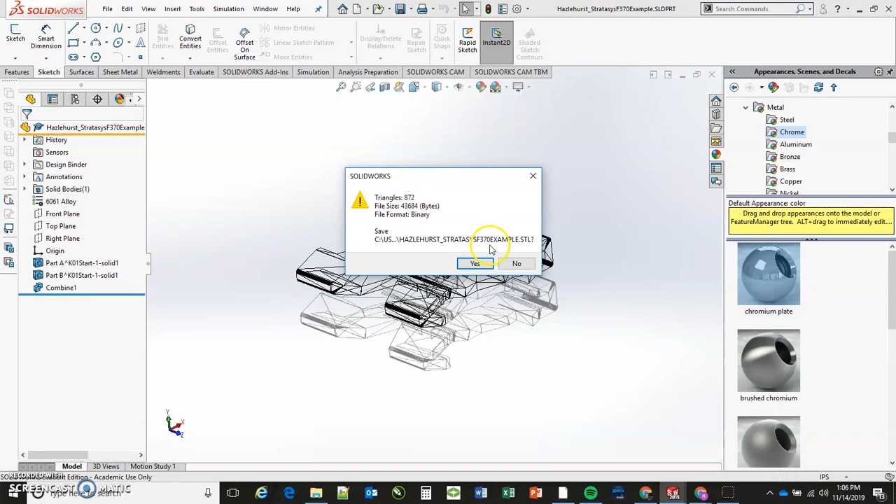After clicking Save, you now have your STL file. It will come up with a message saying that it's converting it into triangles, and that just means that it has created a format that the STL printer can then read and process.

Once you've created the STL file, you can now move into the 3D printer software to get it ready for 3D printing. This is often referred to as slicer software, meaning that it takes the file and cuts it into layers, which then can be printed one layer at a time on the 3D printer. In this case, we're using GrabCAD Print, which is the software used by the F370 printer.

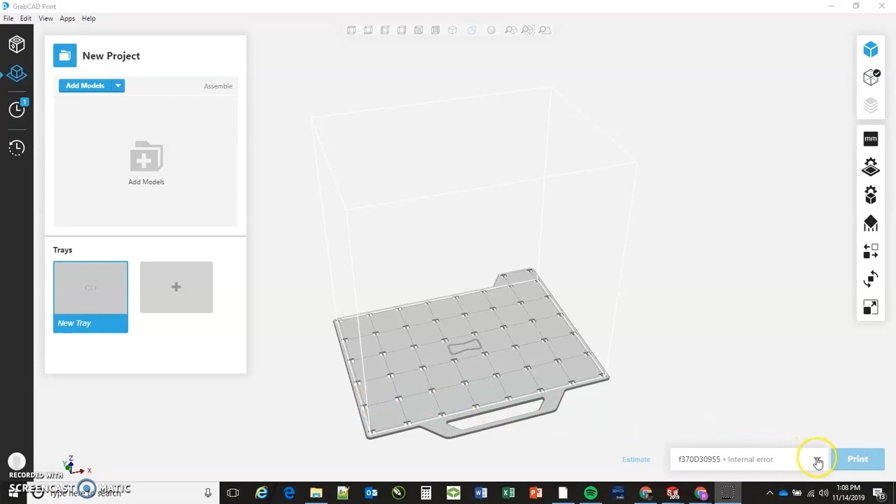You can see here that we have a blank tray ready to go, and what's important is to select the template for the machine that you'll be using. In our case, we need to look for the template for the F370 printer, so you'll need to scroll down the list until you find the Stratasys F370.

One thing you may want to consider doing is clicking on the star, which adds it to your favorites list, and will put that at the top of your menu so that every time you start into the software, you'll conveniently have access to that template. Once the template is selected, you are ready to move on to the next step.

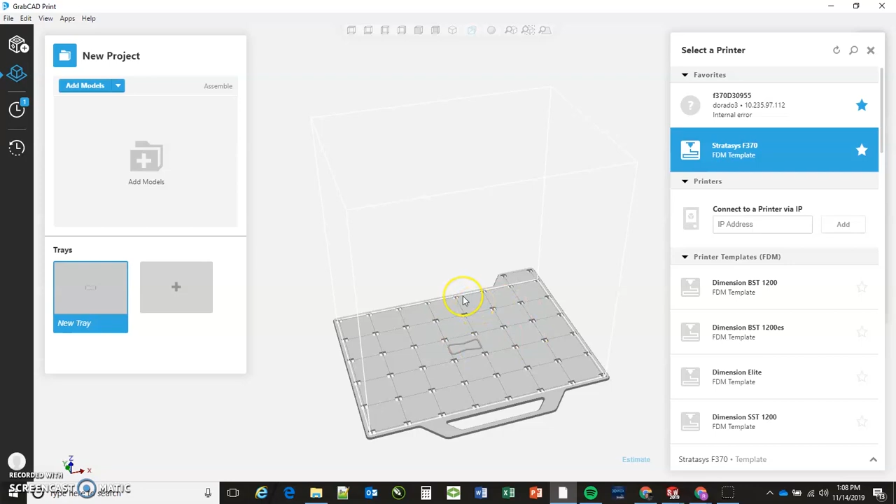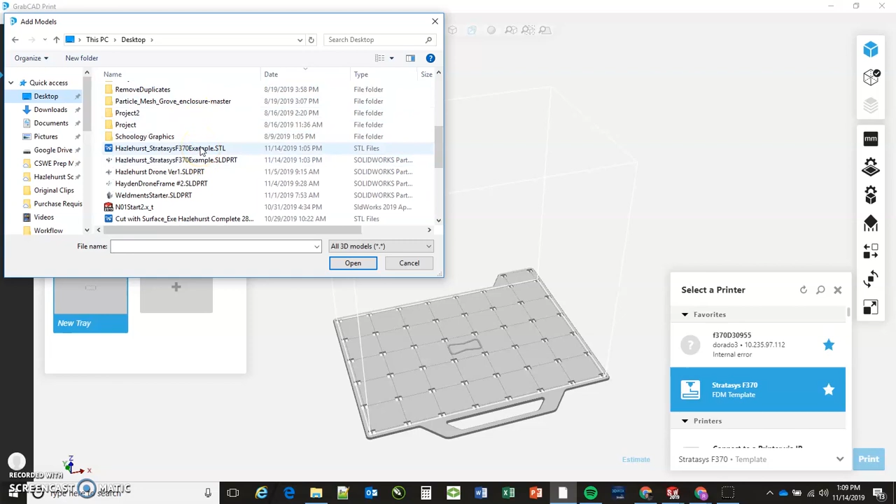You can go over to the Add Models tab, click on that, and it'll open up the directory where you can then select your file. In our case, we saved our file onto the desktop, so we want to look for our file on the desktop and make sure to select the one that's in the format of STL. Once we select that file, we can click Open, and GrabCAD Print will automatically add it to the tray.

More files could be added to the tray at this point, but for now we're just going to work with this one file. You'll notice that our file was oriented in a certain way based on how the GrabCAD Print software chose to bring it in. We can change the file's orientation, and we can change a number of other settings.

Up at the top right, you'll see there's a menu with a blue box that's selected, and that is our Model View menu, and we'll spend most of our time in that menu. When you have that selected, you'll notice there's another menu below it that has many other icons that we can select from. So the first one we'll select from is the units.

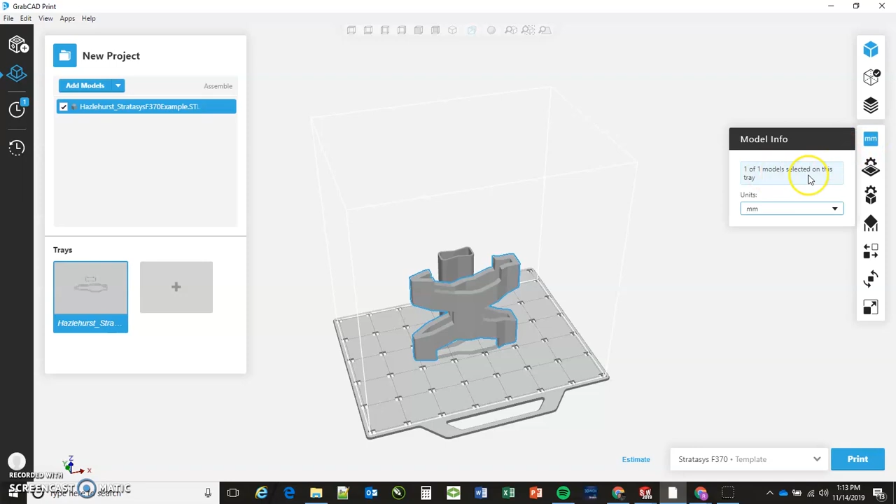We want to be sure to be using the units that are associated with our part. In this case, this part was built in millimeters, so if I click on the Units tab, it will show me that it was done in millimeters. If I change it to inches, what it will do is scale it to that same number of inches, and you'll notice my file becomes enormous.

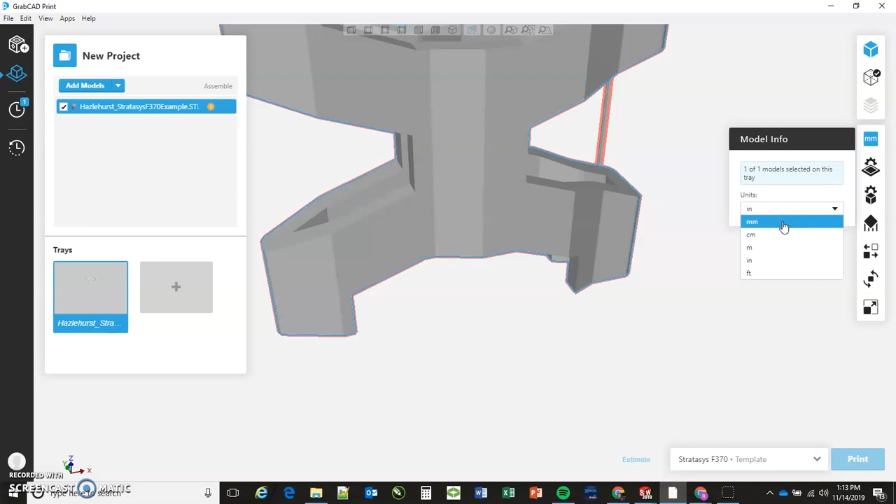I have to zoom way out in order to even see it, and it's obviously way too big to print in the 3D printer. So we want to make sure to use the units that our file was created in. Now I have to zoom back in so I can see the file, and you can see it's restored back to its original size.

The next menu is Tray Settings. And within Tray Settings, we can tell it what kind of material we're going to be using with our printer. In this case, we're going to be using ABS plastic, so we just need to select the F123 ABS option. The other options are defaults, and typically we do not need to change any of the defaults here, so we'll just leave them alone.

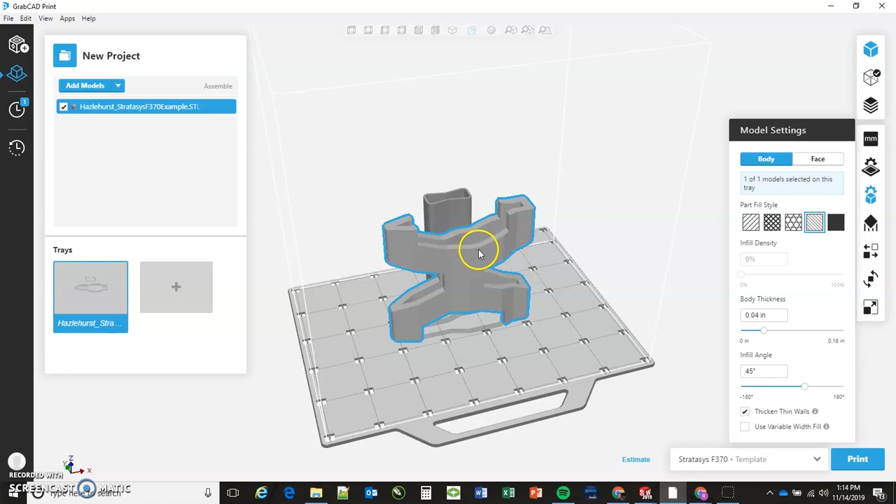The next option is the model settings. The primary thing that we're going to control here is the infill of the model, or in other words, how solid the model will be when we get done creating this model. An infill on the far right in the black box is solid. That means that the thing will be solid plastic when it's finished.

Obviously, the part will be very, very strong, but it will also weigh more, and it will use a lot of plastic in the process of printing. So rarely do I ever print a part solid. You rarely need that kind of strength. In fact, I usually print using the sparse infill pattern, which you can see on the far left.

That has the most hollow setting, and it does have a slider bar that's adjustable, so you can change the default settings to some other settings. But I typically leave mine at the default setting, and you can always say restore to go back to that default setting. In between, you'll see there's other infill options that can be selected, and so you can always have more infill if your part needs to be stronger.

But generally speaking, for the purposes of a prototype, you may not need as strong a part. Perhaps when making a drone or some other part for something that's going to have to be fairly sturdy, you may want to go with one of the more dense infill patterns to give it additional strength. But again, rarely do you really need to select the solid infill pattern.

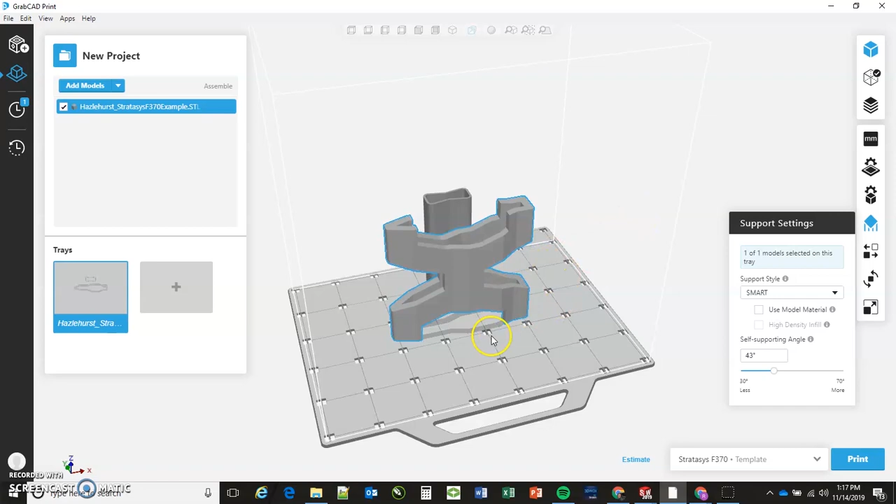Support material is the material used to hold up the part while it's being printed, or in effect, to act as a mold. One of the beauties of the F370 printer is when it needs to fill in a space, like the one shown here on this part, it will do it using a soluble support. Soluble support means that the support can be dissolved in a mild caustic bath after the part is printed.

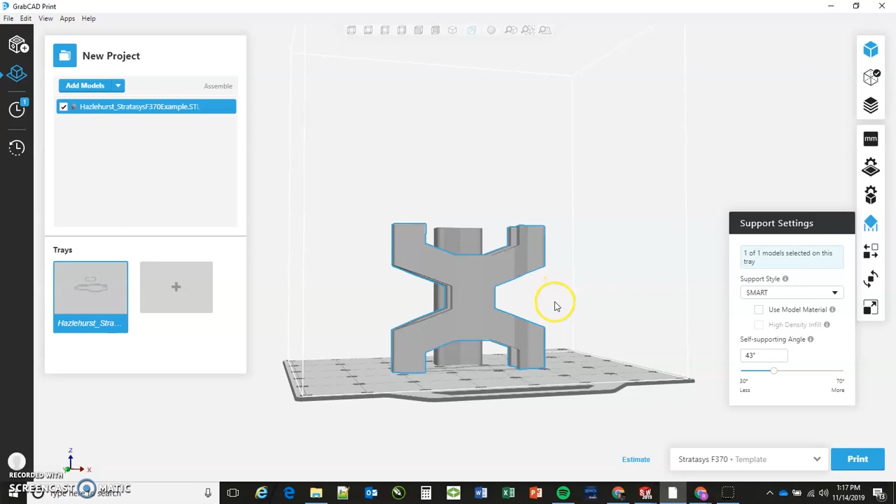So if we were to print the part in this position, that little upside down U-shaped opening would be filled in with support material, which would have to be removed from the part once it was done. Typically, the support settings used in GrabCAD Print are perfect if you just use the Smart Support option. It's a very intelligent support option, and the software will take care of most of the default settings that you need. You'll notice there are other options on the menu, but just select Support, Smart Support, and you should be fine.

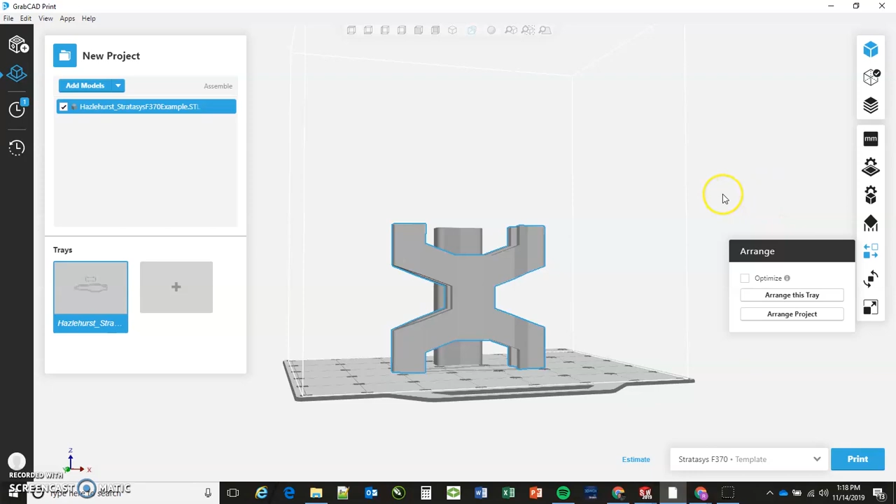The next option on the menu has to do with arranging the tray. This would be primarily in the case of having multiple parts on the tray. You'll notice, by the way, I can change my view of the tray by right-clicking and moving my mouse, which will reorient the tray. I can also zoom in and zoom out using my mouse. If I click Arrange this Tray, if I had multiple parts, GrabCAD Print will automatically move those parts around into the most efficient pattern.

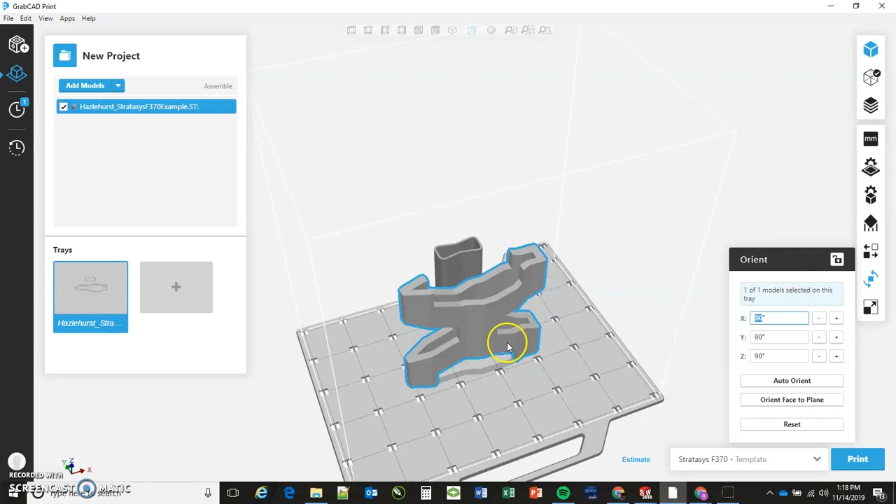You'll also notice there's this funny-looking bow tie shaped piece of plastic that's showing that it's going to print behind my part. That is what's called a wipe tower, and the wipe tower can be used to keep the head clean during the printing process. So the head will print a little bit of your part and then go over to the wipe tower and wipe off any excess plastic and then come back and continue printing your part. You can auto-arrange the tray and have it set up the tray the way you want.

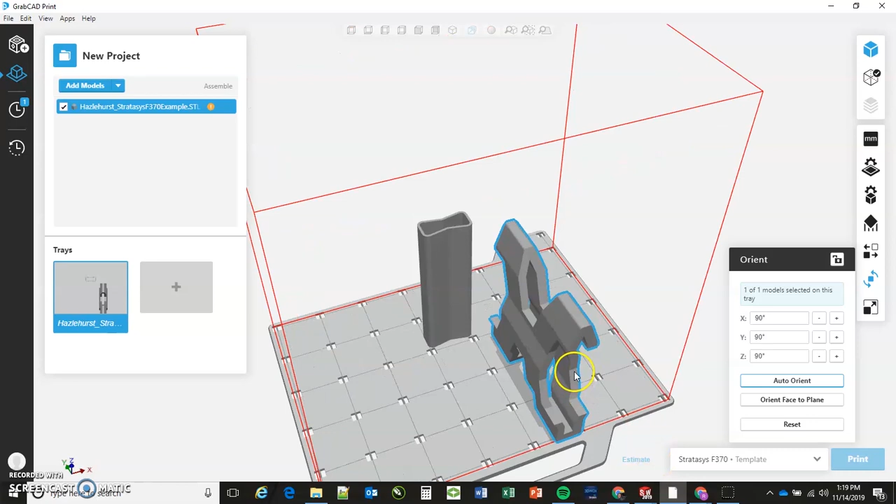Similarly, the next option down has to do with orienting the part for printing. This is a very important setting because it will determine how much support material your part will require. You'll notice here that I was able to select Auto Orient, and GrabCAD Print oriented my part to be standing vertically, pretty much like it was from the outset. But you'll notice the box turned red when it placed it.

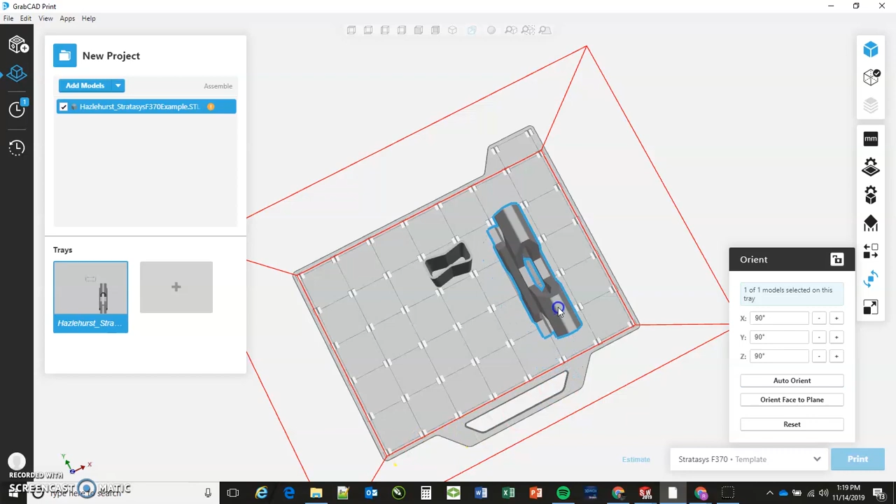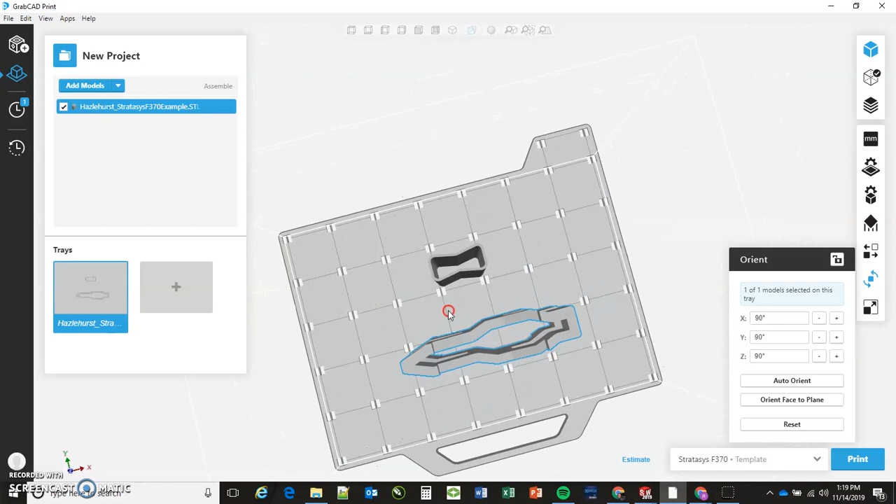By just dragging my part back into the build area, I can make sure that my part is acceptable to GrabCAD Print. If I do another auto arrange of my parts, you'll notice that it put the part on top of the wipe tower. So one thing you can always do too is move that wipe tower over onto that little tab in the back of the print surface, and you can place it in that location to get it out of the way.

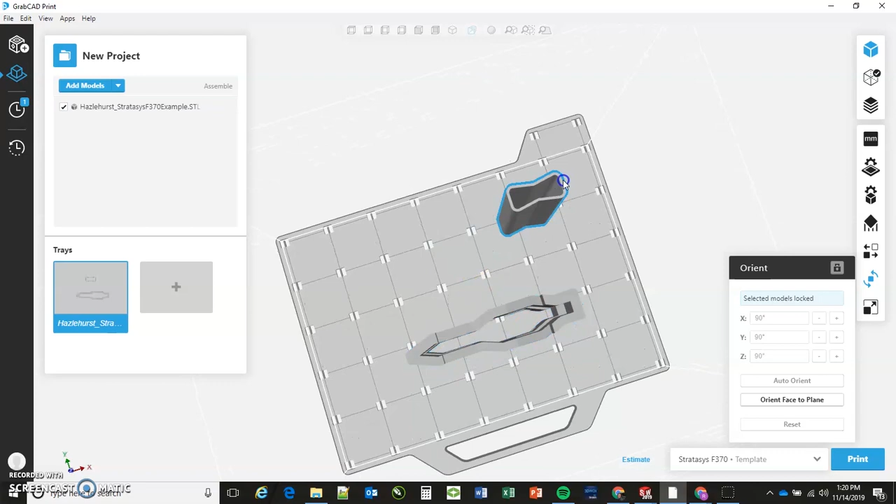One thing though that's important is to keep the wipe tower and the part close together so that the head does not have to travel long distances between printing the part and wiping the head. And so I usually try to keep the part and the wipe tower located fairly close together.

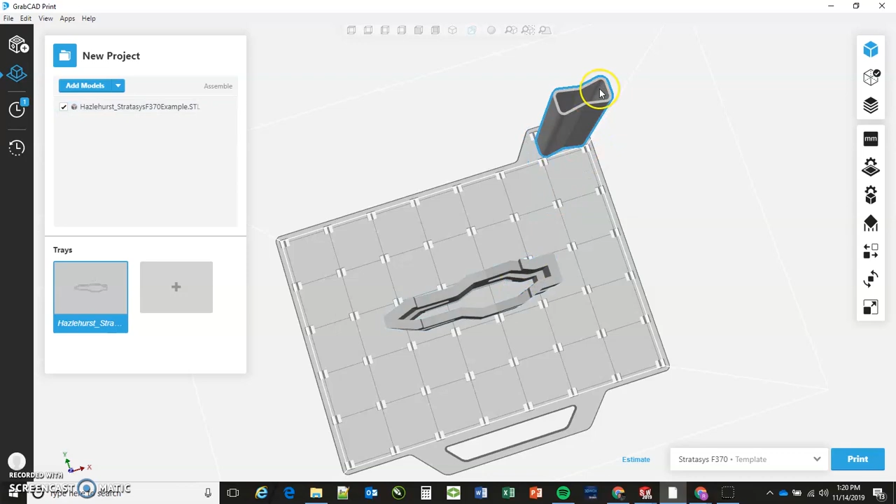You will notice if I go to auto arrange, it will pull the wipe tower back off of that little tab. So I just manually move the wipe tower back to that little tab and then manually move my part back close to the wipe tower, again, to minimize distances between the two and to speed the printing process.

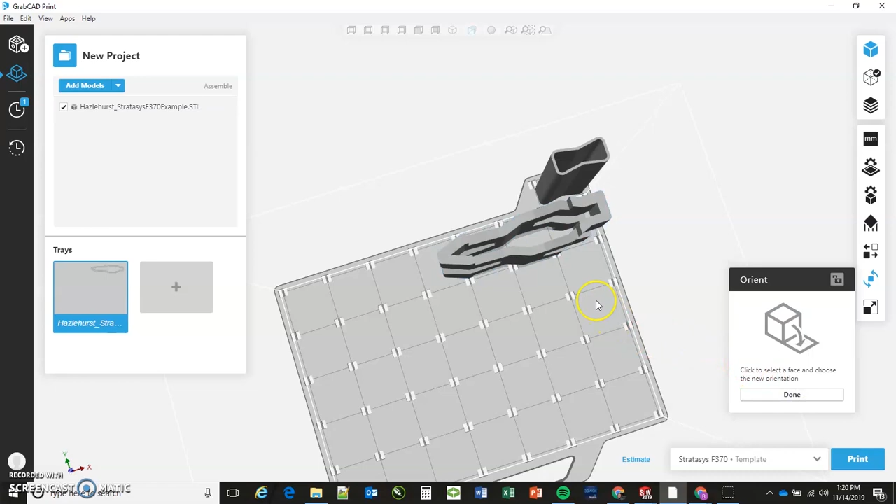One other option, if you think you want to print your part in a different orientation, is to select that you want to orient the part. And what you can do is, in this option, move and select a face on the part, and then it allows you to select whether you want that face to be the top, the bottom, the left, the right, and it will automatically reorient the part accordingly. So in this case, I selected the face on the side of the part and said make that the bottom, and GrabCAD Print automatically rotated the part to be flat on the tray.

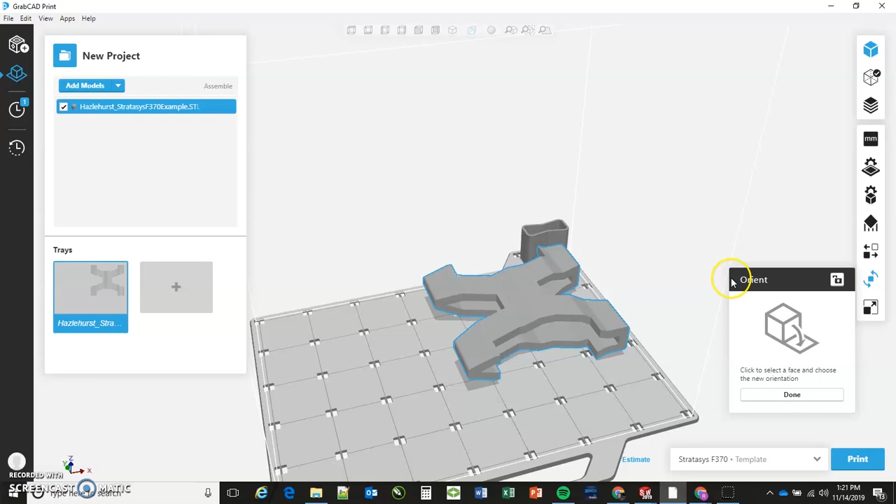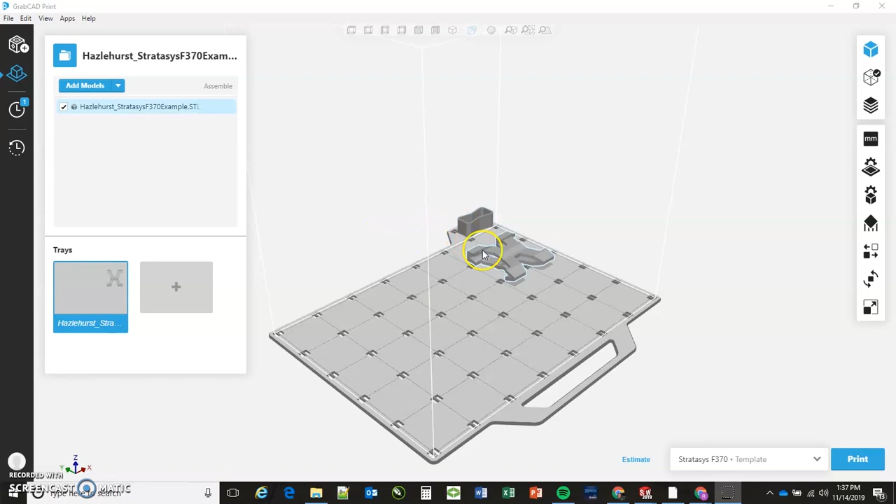If I click Auto Arrange, you'll notice it stands right back up again. So the GrabCAD Print software believes that that's the best configuration for printing. And in a minute, we may see why. You will notice, though, that when the part is laying flat, the wipe tower is much shorter, and so it does not take as much material to build up the part. However, this orientation does require a lot more support material, which is a negative.

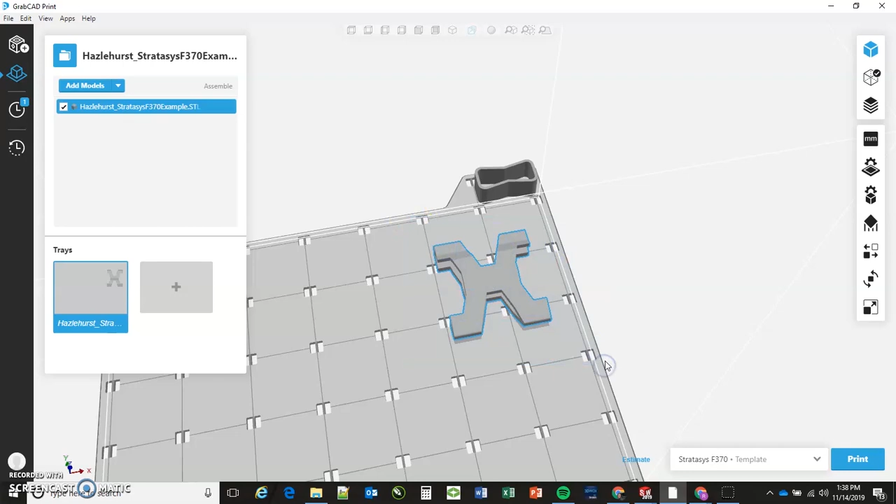Here I'm again using the right mouse button on my mouse to rotate the part around and to see the tray. You'll also notice some helpful tools across the top whenever you're trying to look at what you're doing. There is a top view, a right view, a bottom view, isometric view. There's all kinds of views that you can select from. So in this case, that's the front view, and now I can select the isometric view, which is the view I often work with.

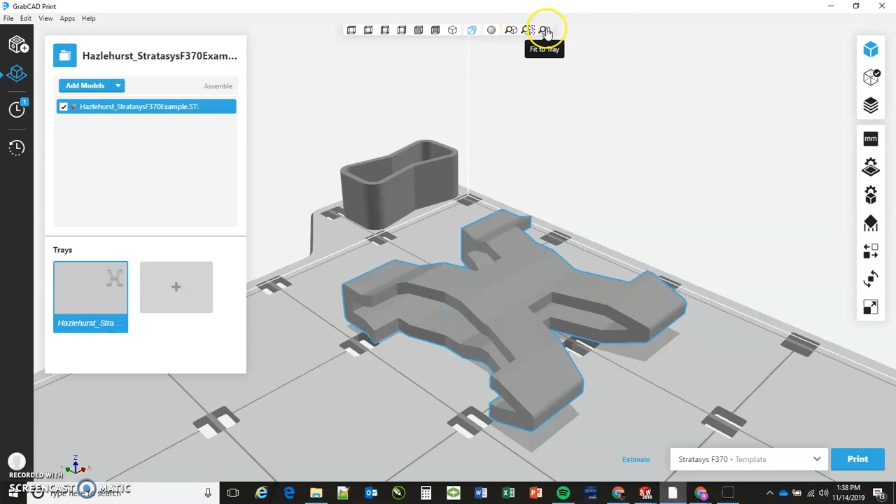You'll also notice there's some quick zoom tools out on the right-hand side. If I say zoom to all the parts that are on the tray, it will zoom in to whatever region it needs in order to see all the parts. I can zoom out and see the entire tray, or I can select a part and then say zoom into that part. So in this case, since I only have one part on the tray, it's not very exciting, but that is the way you can control your different views very quickly and easily.

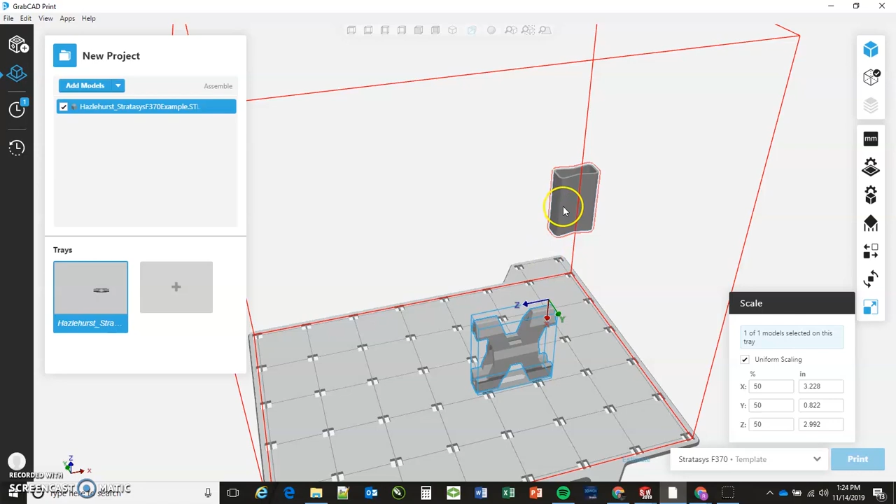Once I have the part created, I can also scale the part. You'll notice that I have a scaling tool over on the right-hand side selected, and I can scale it. Now, the downside of scaling a part is typically when we create parts in SOLIDWORKS, we do so to a specific size. By scaling a part down using the scaling option at the bottom of the menu, we end up making a part smaller than what we designed it to be. That's great for prototyping, but if you were trying to create an assembly where all your parts had to fit together, scaling would result in your part being the wrong size for that assembly. So it's best to make sure to print things the original size unless there's some really good reason for printing a smaller version.

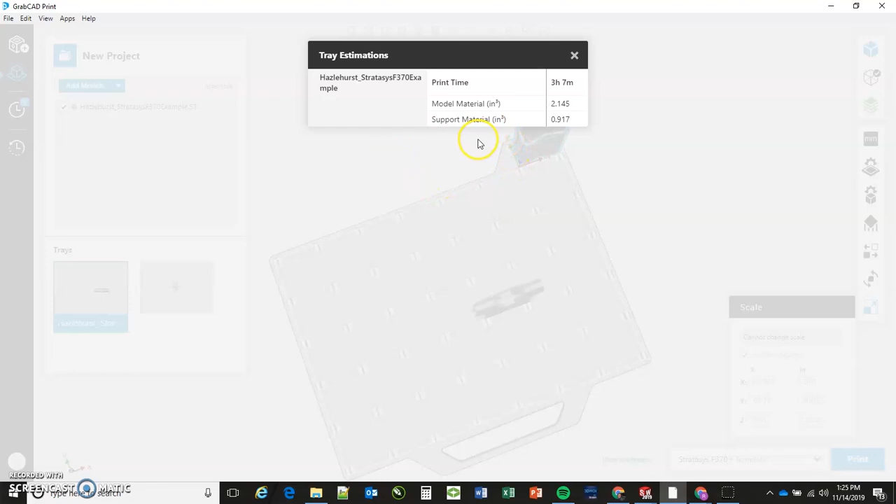Down at the bottom left, once you've got everything set up, you can click on the Estimate button. You'll notice that it pops up a menu and shows you how much time it's going to take to print your part, and also how much model material and support material it's going to use. In this case, make a note that the support material is just a little bit below 1. If we reorient the part, we may be able to reduce the time that it takes to print, but we may find that by doing so, we increase the amount of support material required to print the part.

So right now we're in that standing up position, the one that GrabCAD Print recommends. Here I've laid the part flat, and you can see that although the time has been reduced by a fair amount, the amount of support material has gone up. What's significant about this is the support material is the most expensive material in the printer. So reducing the amount of support material can save money, but at the same time it may take longer to print the part in that configuration. So there's a trade-off to be made between time and support material.